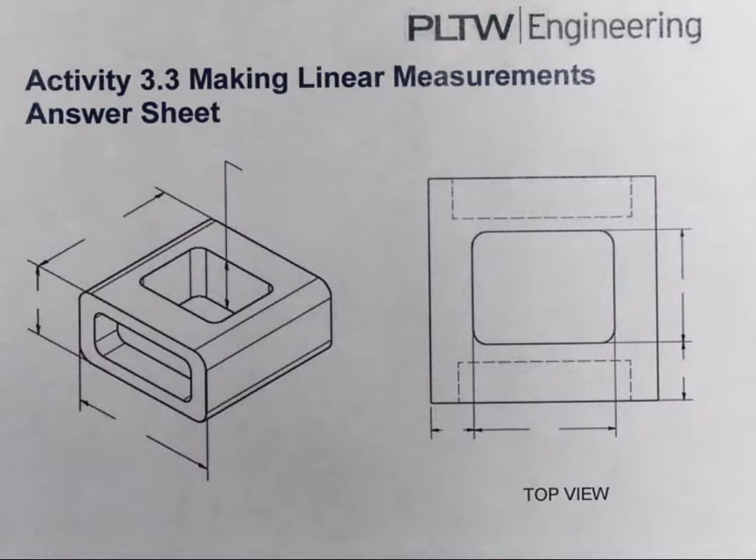Alright, in this video we're going to take a look at one of your submissions for the first week and taking an Automoblox component. In this case we're going to look at the T9 body. So here I've got a T9 body actually, and I printed off an answer sheet from the courses, and here we can check and modify.

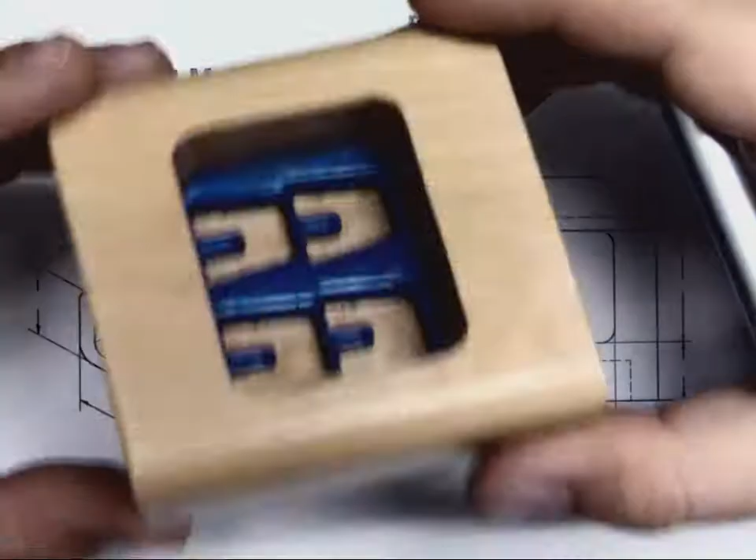You were to model one of these as part of this prerequisite training. And what we're going to do is just verify some of the measurements and make changes if we need to. And then in the next video, we'll look at how to change those in Autodesk Inventor, after you've already modeled and made this part. But for right now, to check this and look at measurements, I'm going to go ahead and use my caliper.

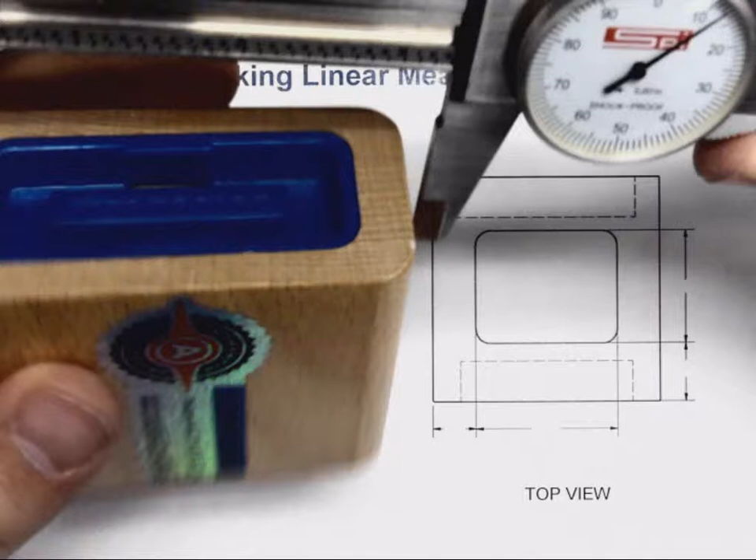So they're showing you, using dimension lines and extension lines, how we should be measuring these parts. So I'm going to go ahead and measure this overall width of the part here. Here on my caliper I'm seeing about 3 inches, so 3.2, and then I'm a little bit past 8 in this case. So here I got 3.20, actually I'm close to 9 but not really.

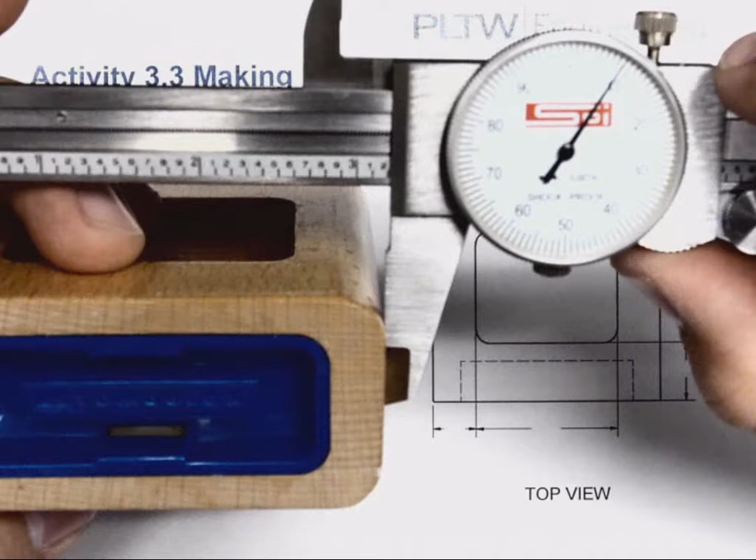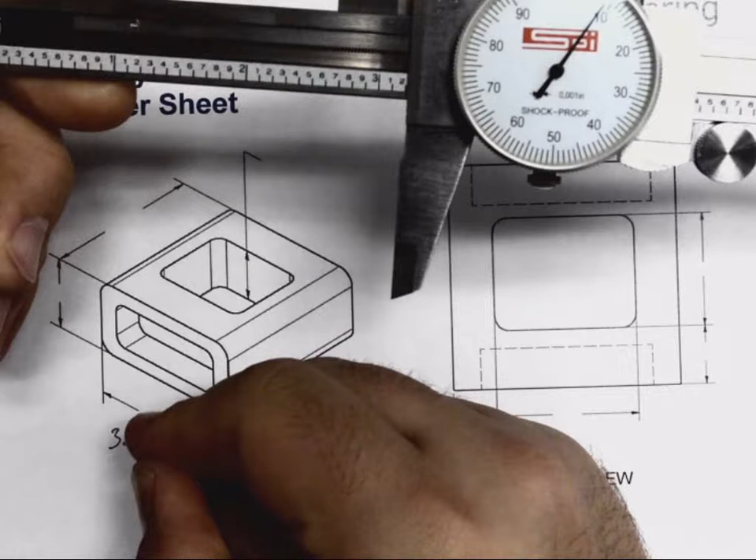3.208. And then for my extra significant digit to indicate the uncertainty of the measurement, I may throw in a 9 there, since I'm pretty close to 9. So as far as my reading goes, my overall width is 3.2089. So if I was to read this to the thousandth of an inch, which is typically the level of precision these calipers can handle, since I'm not to 9, I would record this as 3.208, or 3 and 208 thousandths of an inch.

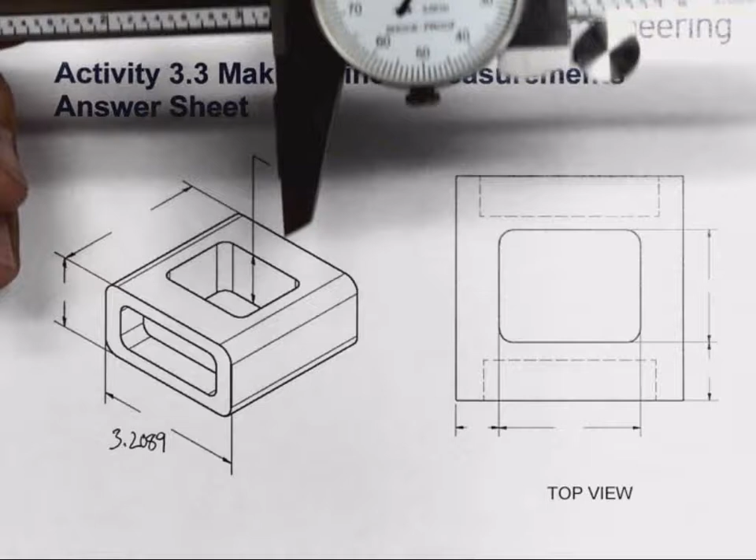So in the terminology, I try to get my students, at first, to say it with 3.2 just to get them used to it, and then after they get the hang of reading this, I want them to say it just like how we said there. So 3 and 208 thousandths of an inch.

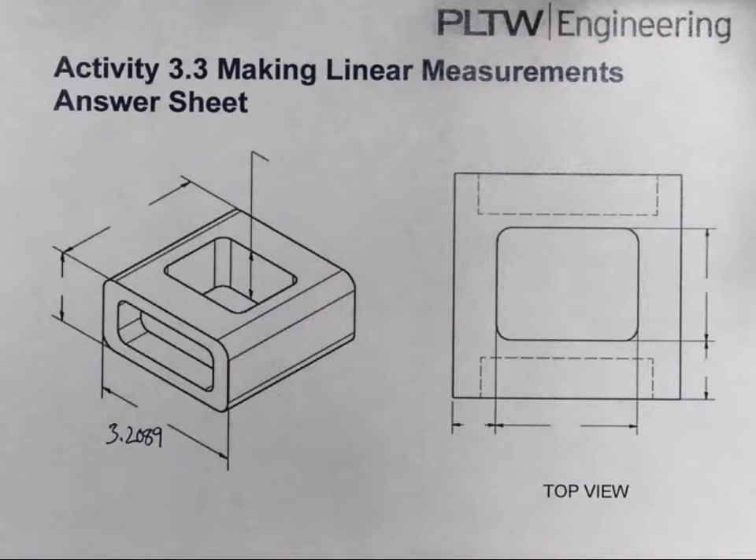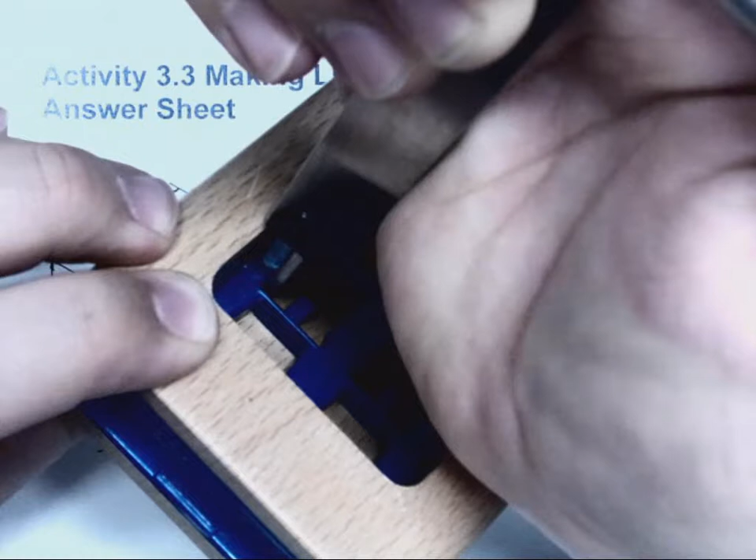And as we take a look through the document here, these are going to be pretty standard outside measurements. As far as the depth of the hole, one of the things on these Automoblox parts is you're not going to be able to pull these plastic inserts out. So here's the passenger section, and they don't have that plastic insert being considered. So I always try, if you can, to get down to the wood in the bottom between the shapes, and then get a measurement along the side here on the reference edge.

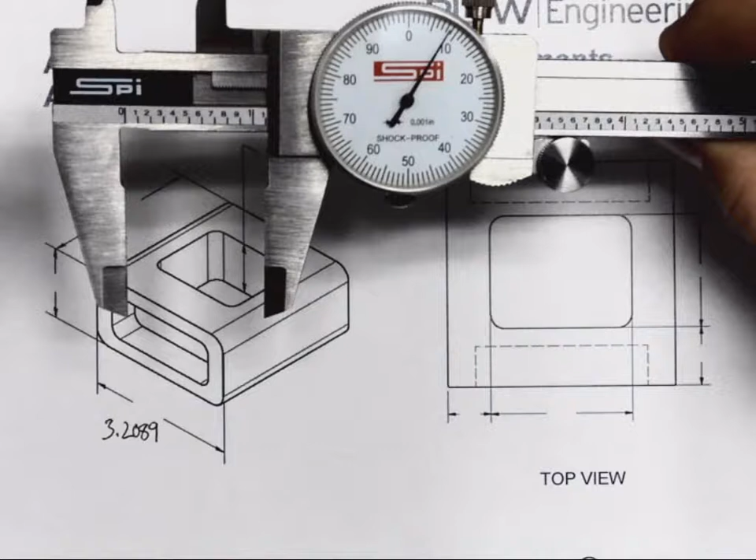So here I'm getting about 1.1, about the same kind of measurement. I'm at 0.85. I'm hitting right about in the middle between two of the graduations inside the dial. So that would be my measurement there. In a lot of cases, teachers will say if it's past 0, you round up to 5, and if it's on the measurement, you'll keep it at 0.

I know a lot of science teachers do this, and I would really encourage you to think about whatever way you want to teach your students and how you were taught. So in your training, use it to your advantage. Alright, so the top view here, these are just going to be very simple inside measurements.

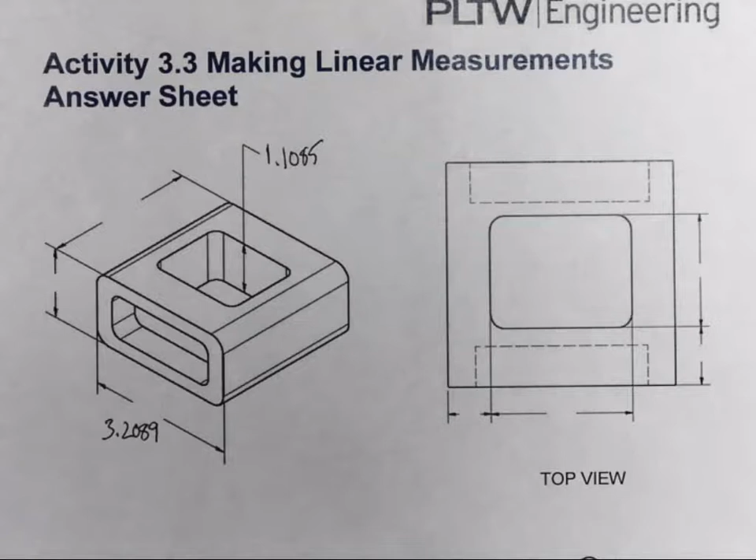So I would go ahead and utilize your caliper this way. So to look at this, you can get an outside measurement measuring the thickness, and then that's going to be pretty much it. As far as scrolling down here to the bottom part of this, here are these openings.

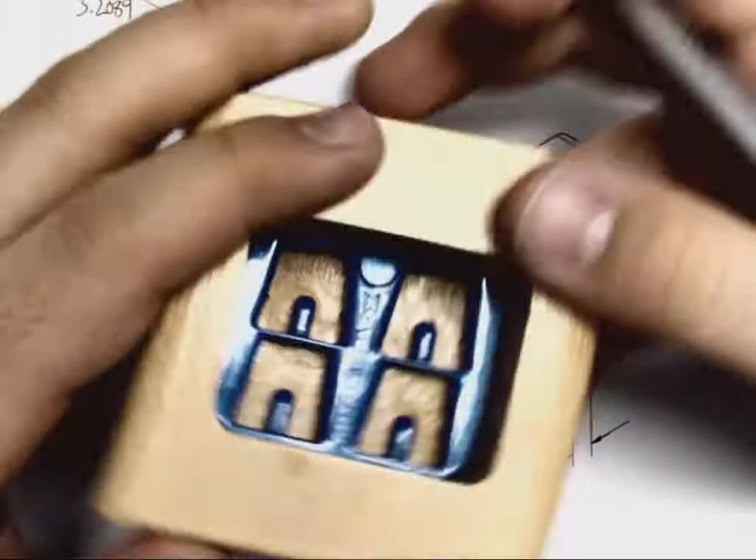So I will tell you, the openings on this side and this side, they do look like repeats of each other, but they're actually different. One will have the 2-block socket in there, and one will have the 1-block socket on the other side. So kind of making sure, and your students will get confused with this, so kind of walk them through that, this is not just a copy of each other. We're actually on 2 different holes, and they are slightly different from each other as you do that.

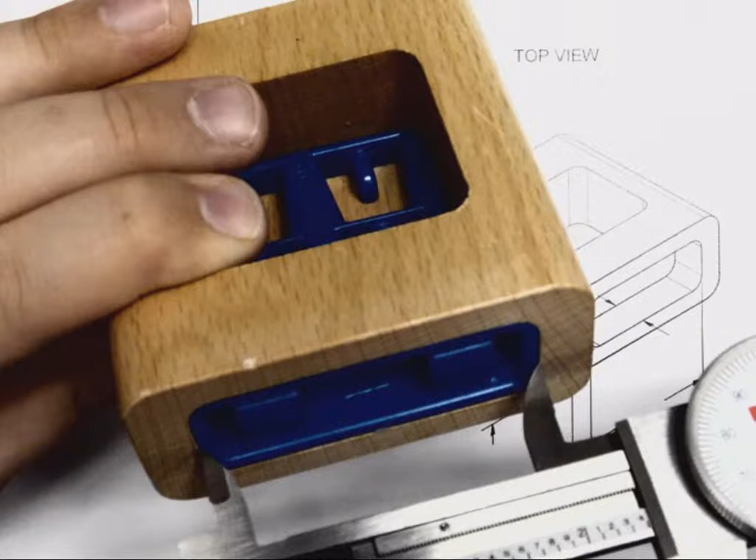As far as the width of this, I usually like to use the inside, and you can usually catch a little bit of an edge inside of the wood. So I try to measure this without considering the insert, and then I open it up to the outside edge and then get my measurement. So here I'm getting about 2.4, and as I take a look at my dial, I'm pretty close to 07, and I'll put 9 in there. So inches, and that's kind of what I'm looking at as far as these kinds of components.

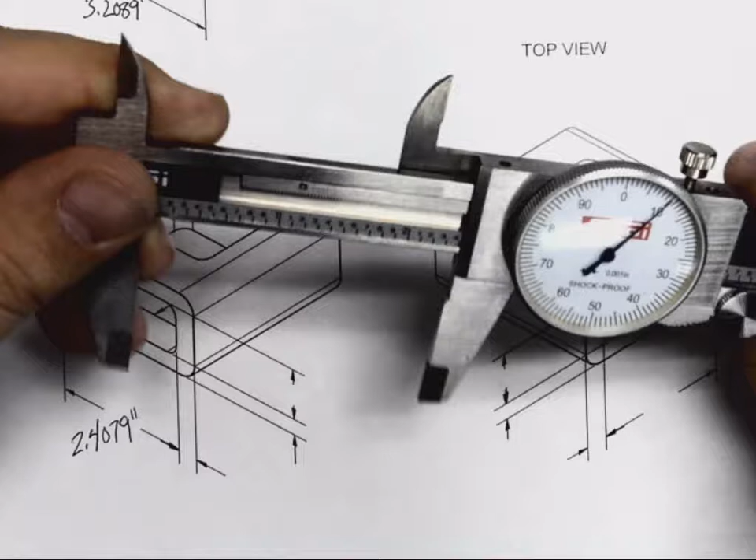So make sure that you are getting some of these measurements. And again, you don't want to pull these out, because this will damage your Automoblox and you're not going to be able to get these back in. So these are glued in, and trying to pull these out is not going to be a good scenario.

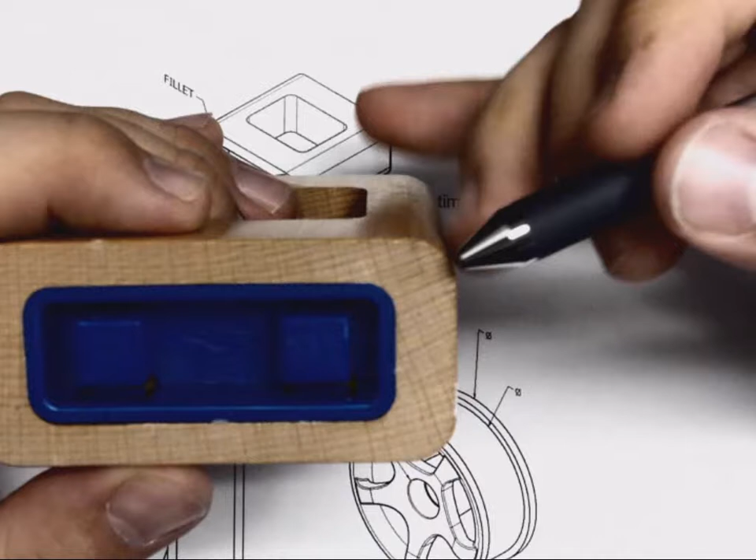Alright, the last thing that I will cover to end out this video is going to deal with the estimated fillet radius and estimated round radius. So in terms of what they're talking about, students will get really confused by this. They need to measure the points of tangency. So the points of tangency are, as this comes out of the curve, where does it start to become a straight line? So I'll use a pencil to kind of mark here.

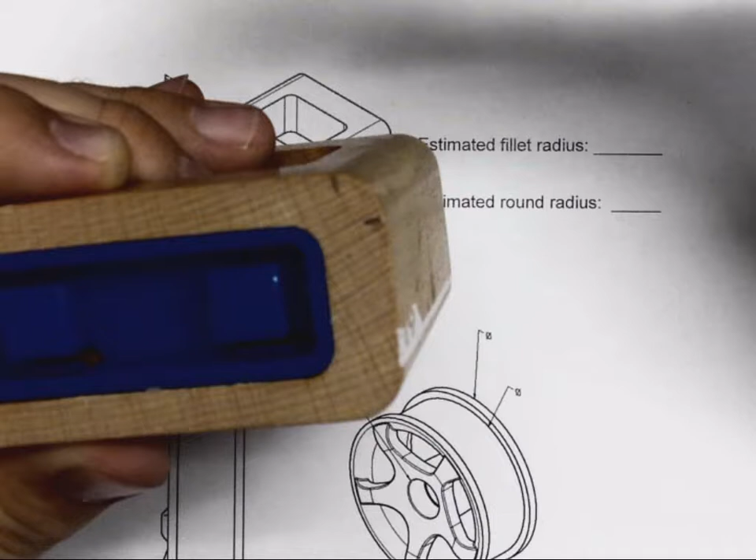So here's my curve, and then as it comes up, I start to get into the straight line right about here. And then the same thing as I go down along the curve and it starts to become a straight line, I'm going to go ahead and mark these 2 points. So the caliper's really not made for measuring this so much. That's why they have an estimated fillet radius and a round radius. So this is the round, since it's on the exterior face.

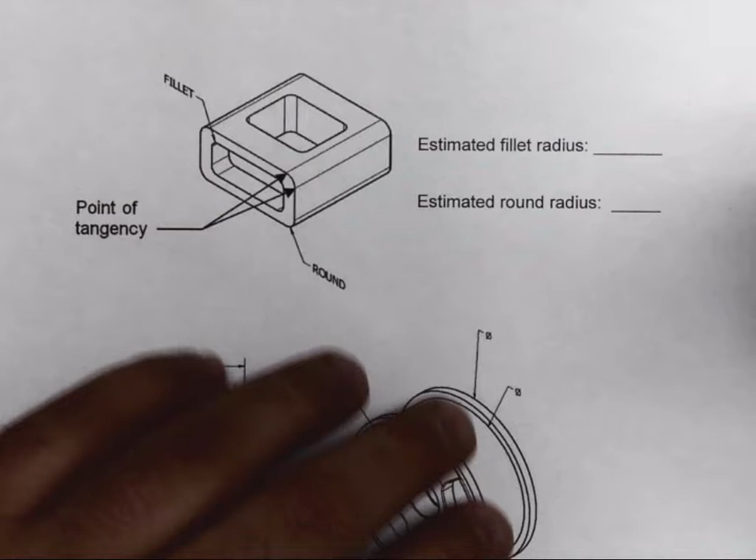And then I'm going to go ahead and measure this. So here I'm about 0.3505. So I would probably say. And then on my estimated, or actually I had those flipped. So on my fillet radius, so same kind of scenario here.

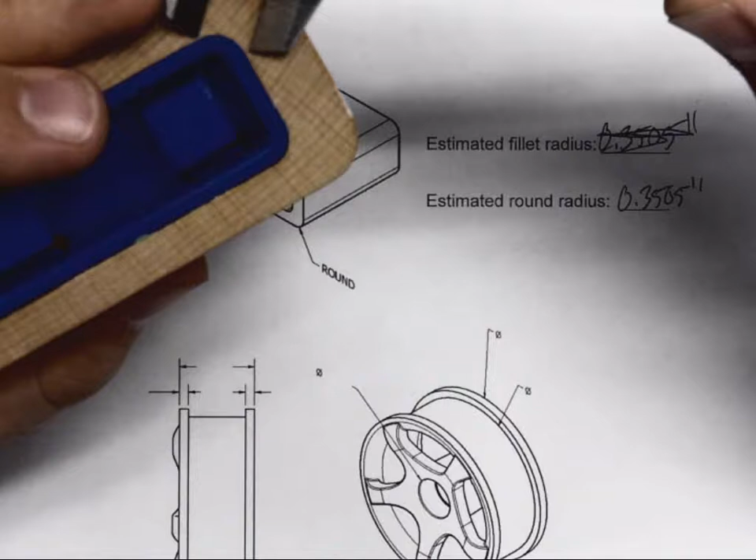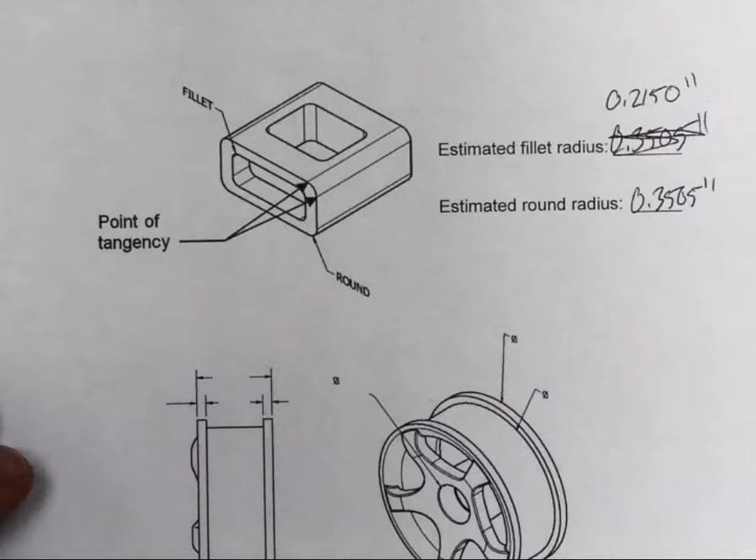I won't mark these, but as far as where those points of tangency are, I'm probably going to be at about 0.215, and I'm right on the mark, so I'll put 0 in there as far as that one. So the fillet radius is the inside rounded edge, and the round is the exterior rounded face on your part.

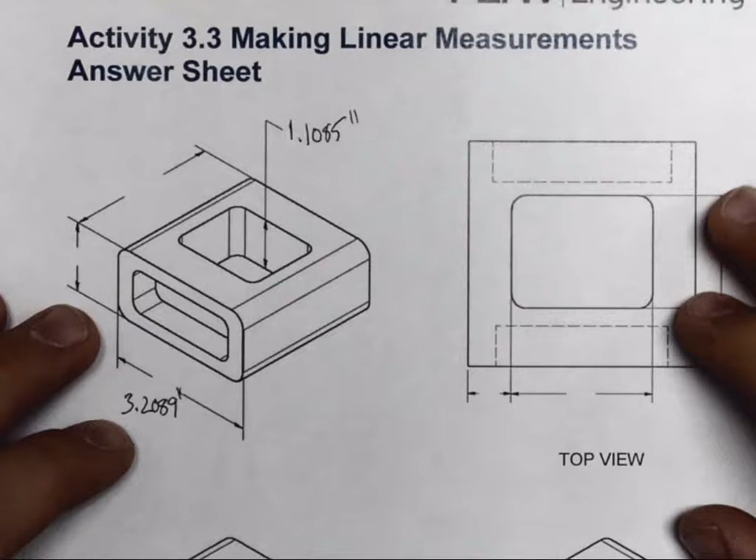So there's just a few things there to keep in mind as far as making the linear measurements with the Automoblox component. So now you will end up filling out the rest of this to take your measurements, and in the next video we'll take a look at how to, not really so much create, but edit your measurement that you guys had from making this part in prerequisite training.